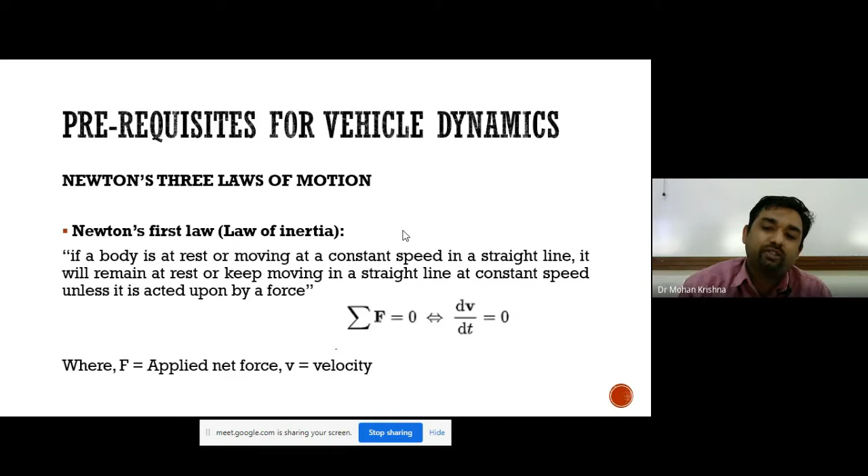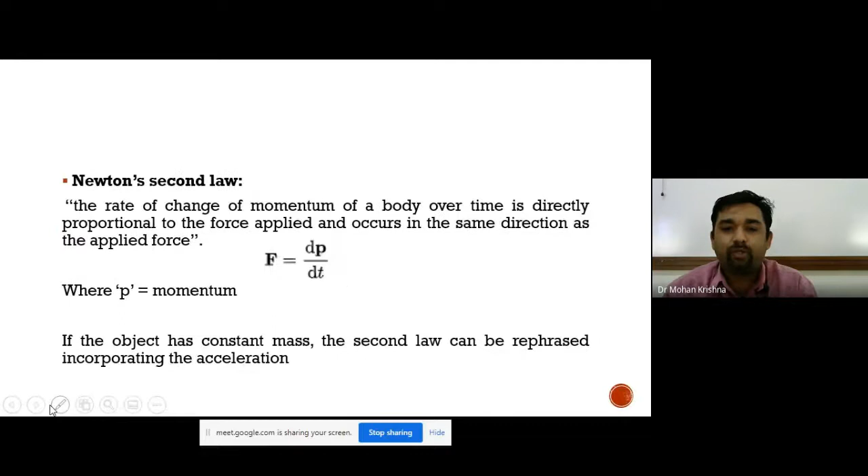So in essence, we need to understand Newton's 3 laws: the law of inertia or the first law, then the law of momentum or the second law, and the third law, which states that for every action there is an equal and opposite reaction. So for every force which the propulsion unit of the vehicle exerts on the ground, there is an equal and opposite force exerted by the ground or by the friction of the rotating parts of the vehicle itself, which tries to oppose the movement of the vehicle.

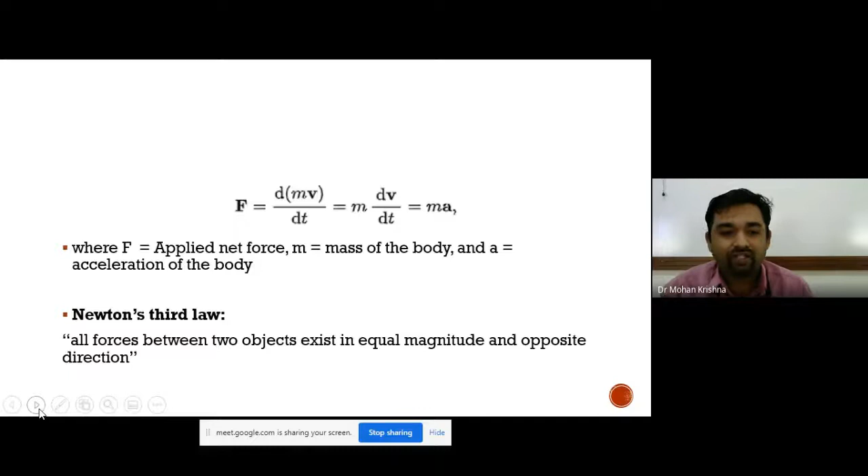So therefore, Newton's 3 laws must be taken in essence to understand the dynamics of electric vehicle. I don't need to elaborate on the 3 laws. I think all of you would be aware of it. So why do we go for electric vehicle? Why do we analyze the dynamics of electric vehicle? Let us understand the background before going in detail regarding the dynamics of the electric vehicle.

So first and foremost, as per Newton's law of momentum, the acceleration of any object is proportional to the net force exerted. So if the net force is 0, then the object doesn't accelerate. So there are several forces which act on a vehicle. To give you a brief overview, although we will deal with this in detail, as the vehicle is moving, there is resistance offered by the wind. There is resistance offered by the tires of the vehicle, by the road, and by the rotating parts within the vehicle itself.

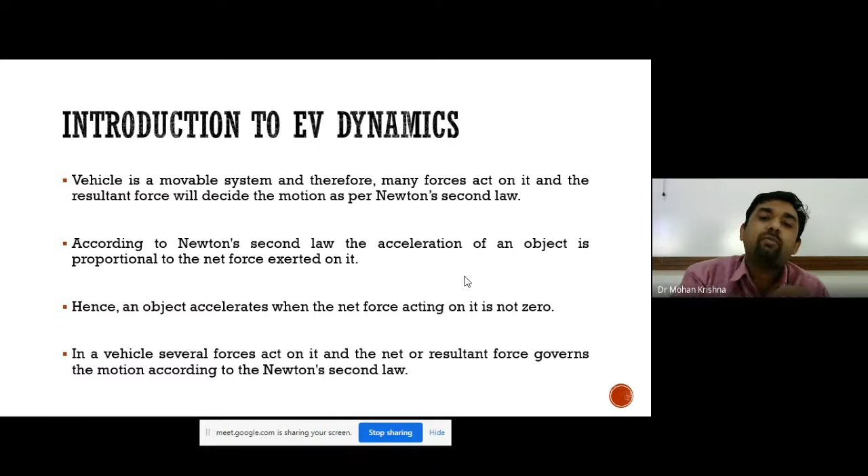So we have to consider the effect of rolling resistance forces, the drag forces, as well as the friction when our vehicle is moving, and the resultant force which needs to be exerted by the propulsion unit of the vehicle must overcome all these forces. So therefore, which subsystem of the electric vehicle is responsible for providing the tractive effort to overcome all these forces is what we are interested in.

So before going into that particular subsystem, briefly, when we discuss the three different subsystems of an electric and hybrid vehicle, we have the energy source subsystem comprising of energy sources like batteries, fuel cells, ultracapacitors, petrol tank in case it's a hybrid vehicle. Then we have an electric propulsion subsystem comprising of our power modulator, the machines which act as a prime mover, and the transmission components like gears, differentials, axles. And then we also have the auxiliary subsystem.

To give you greater clarity, you can see the different subsystems here. The energy source subsystem not only comprises of the battery pack, it also has the battery management system for condition monitoring of the battery. So the energy source subsystem comprises of the battery pack, the protection and isolation circuits, the battery management system, and the refueling unit. Here we are considering battery as the energy source.

So the energy source subsystem is responsible for providing power to both the electric propulsion subsystem as well as the auxiliary subsystem. The auxiliary subsystem comprises of your starting, lighting, ignition, power steering, power windows. Now even our outside rear view mirrors, ORVMs, are operated electrically. Then we have our spoilers, sensors, infotainment system inside our vehicle. The power requirements of all these are taken care of by the energy source subsystem,

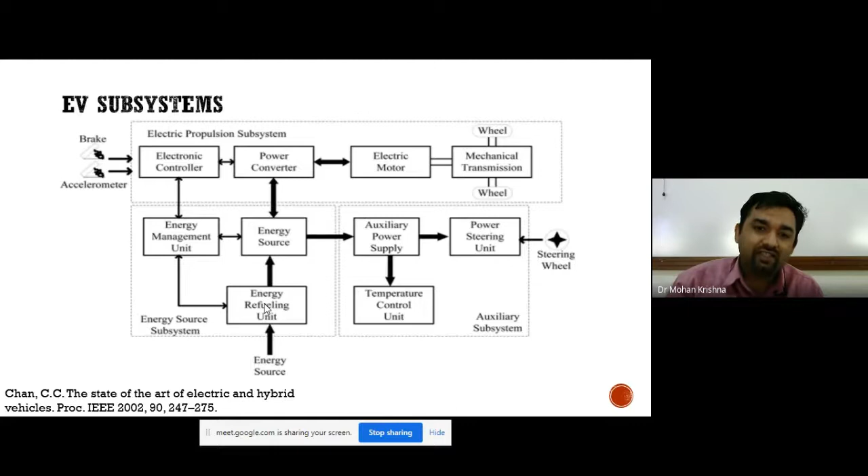apart from that of the electric propulsion subsystem. The propulsion subsystem comprises our motor drive, meaning the power modulator, motor and its associated control mechanism. It is responsible for providing tractive effort or transmitting power to the wheels on the ground to overcome all those forces which act on the vehicle. I've given you a brief overview of the different subsystems of an electric vehicle and the role the propulsion subsystem plays. The main role is in the delivery of your tractive effort.

So I think I have already explained this point. Both internal as well as external forces act on a vehicle in motion, and the propulsion system delivers the thrust for propelling the vehicle in forward direction, at the same time overcoming all these resisting forces.

So wherever I have taken information from, I have taken care to include the source. So I have referred some NPTEL courses. I have also referred some research papers. And at the end, I have also shared some additional information through web links, which would be very useful to the audience in understanding the dynamics of electric and hybrid vehicles.

So to summarize whatever we have discussed so far at the peripheral level, the acceleration or the forward movement of the vehicle depends on these four factors. The power or the tractive effort delivered by the propulsion unit, the road conditions. We'll dwell on this in detail in the forthcoming slides. Sometimes the road can be an asphalted road, it can be a kacha road, it can be a road of RCC, reinforced cement concrete. Sometimes the road can be wet, the road can be dry. Once again, it does affect the movement of the vehicle.

The aerodynamics of the vehicle, the effect of air on the movement of the vehicle, both at the front side of the vehicle as well as at the rear of the vehicle. Finally, the composite mass of the vehicle, very important is,

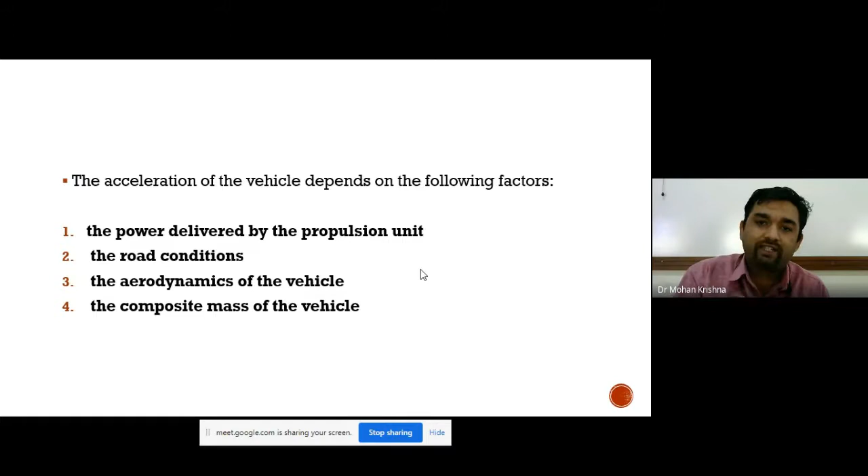Then the composite mass of the vehicle, the weight of the vehicle itself contradicts the movement of the vehicle in a forward direction, whether it is going on a level track or it is going on an inclined track. So, tractive effort. What is traction? Before going into tractive effort, what exactly is traction?

Traction is the forward movement of a vehicle, when you try to propel an object in the forward direction. It has also got to do with how much is the grip of the vehicle on the road surface. So when you are using electricity to propel the vehicle or to provide traction, it becomes electric traction.

So tractive effort is the effort required to propel a vehicle in the forward direction. And this is delivered by the vehicle propulsion system. And this is generally transmitted to the ground through the driving axle and the wheels, that is through the transmission subsystem of the vehicle. Or to be more clear, it is the force which is applied between the tire and the road surface.

Therefore, to all my esteemed audience out there, apart from the aerodynamics of the vehicle and the components inside the vehicle, the road surface and the tire play a major role in the dynamics of the electric and hybrid vehicle.

And since we are talking about electric vehicles, the entire tractive effort has to be delivered by an electrical propulsion system. Here our full electric vehicle is purely powered by battery. We are not making use of any petrol engine or diesel engine or any internal combustion engine for giving the propulsion to the vehicle. We are purely dependent on a battery.

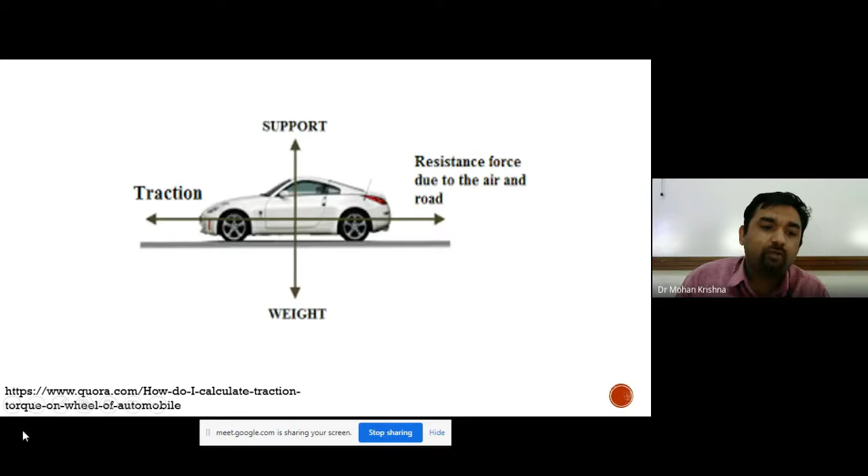Some more clarity. Here you can see the tractive effort is delivered to the rear wheel of the electric vehicle by means of the propulsion system comprising of your engine, the gear, differential. So the tractive effort is in the forward direction, but as per Newton's third law, there is always opposing torque or force which tries to oppose the movement of the vehicle, offered by the road as well as the tire itself.

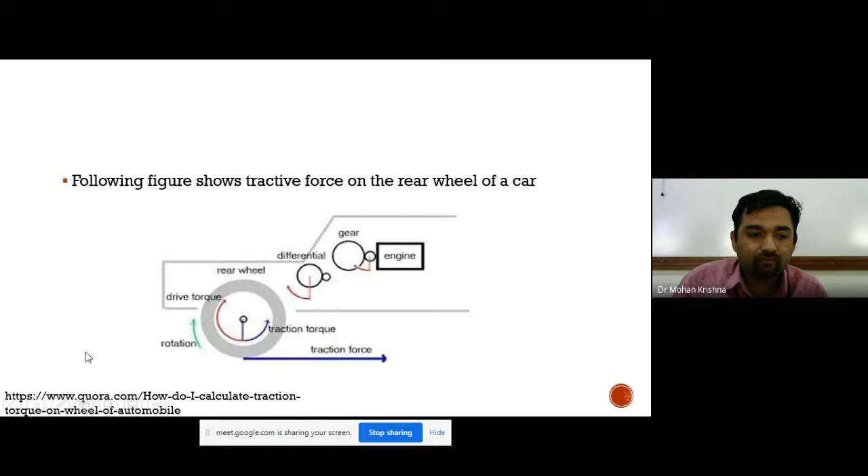So the maximum permissible traction, very important, is how much traction or how much tractive effort can be delivered by the propulsion unit, and what are the factors on which it depends: the composite mass of the vehicle or the weight of the vehicle, and the adhesion coefficient. The adhesion coefficient I have already mentioned in the second line. It is the measure of the tendency of the wheels to slip. To put it in simple words, how much is the wheel able to have a grip on the road surface? That measure is given by the adhesion coefficient.

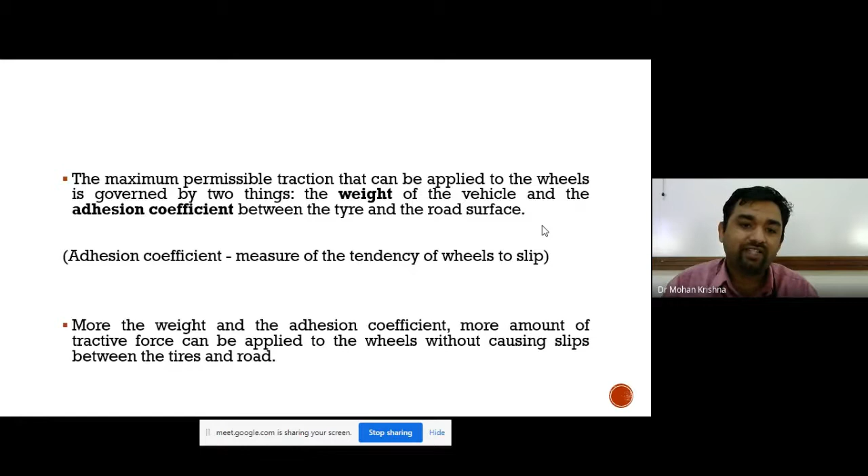So larger the size of the vehicle, larger the composite mass of the vehicle, more the adhesion coefficient, then more amount of tractive effort can be delivered to the wheels without causing them to slip between the tires and the road. So that was a brief explanation on the background: why exactly do we need to study and analyze the dynamics of an electric and hybrid vehicle?

So prerequisites are Newton's 3 laws of motion. And by now, I think all of you would also be aware of the role which the tire of the vehicle as well as the surface of the road plays. So now let me straight away go into the diagram. I would excuse myself, whatever I have drawn, it is not to scale. So kindly excuse me, I have tried my best to depict it.

So we have a vehicle here which is moving at an angle theta inclined to the surface. It is moving at a velocity v having a mass m. The tractive effort, represented by FTE, is in the forward direction. This is delivered by the propulsion unit of the vehicle. Then you have the force due to linear acceleration as well as angular acceleration: the force required to spin the rotating parts of the vehicle and the force required to propel the vehicle in the linear direction, also represented by forward arrows.

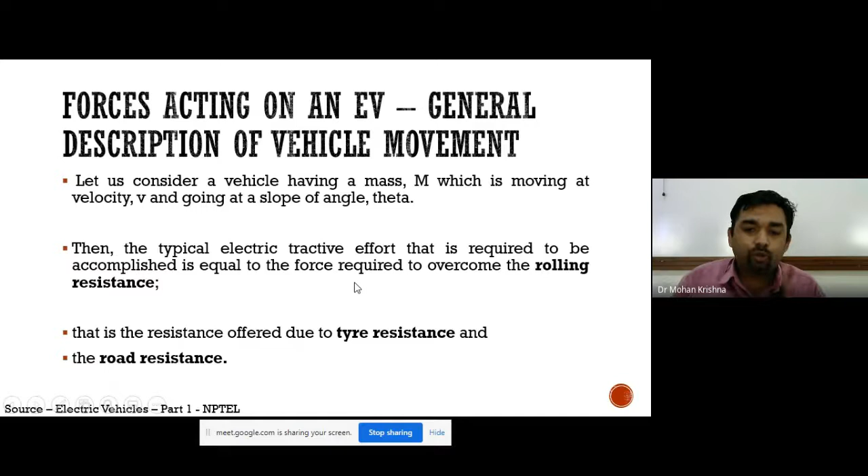So the typical electric tractive effort, as you had seen in the diagram, should overcome the rolling resistance, which is the resistance offered by the tire as well as the road. It should also overcome the aerodynamic drag. And the aerodynamic drag and the gradient force are all the more prominent when the vehicle is moving uphill or downhill as compared to a flat track. So the nature of the track in which your vehicle is commuting also matters a lot, whether it's a level track or an inclined track, or if you're going uphill or downhill or on a flyover and so on.

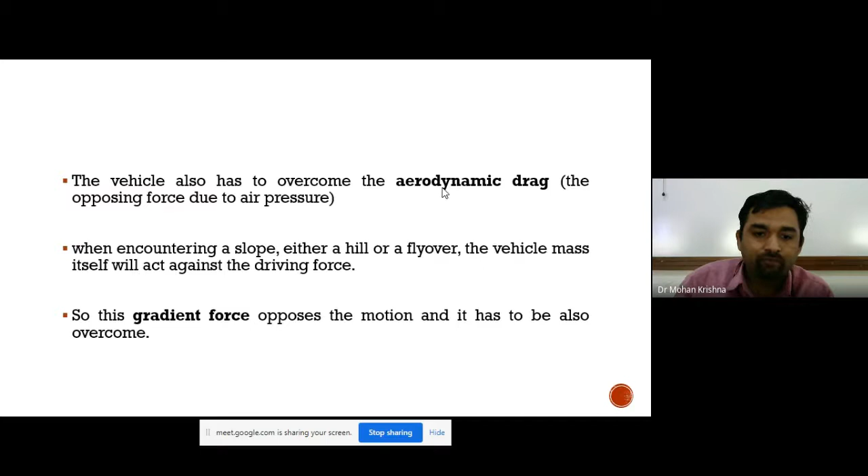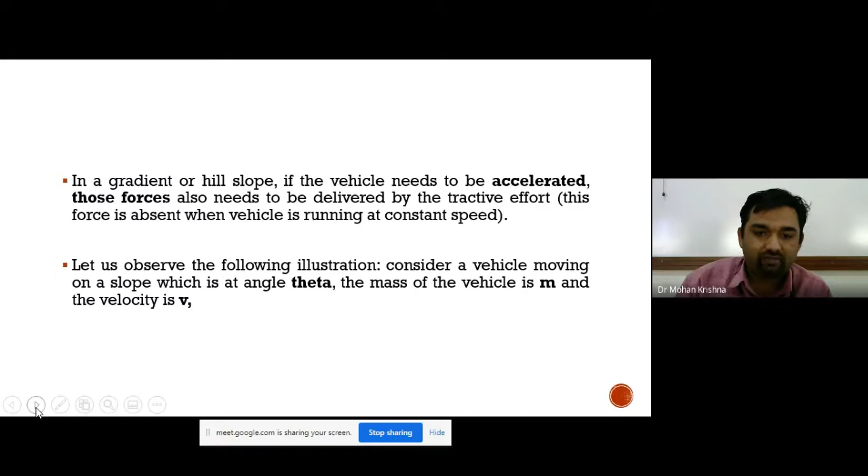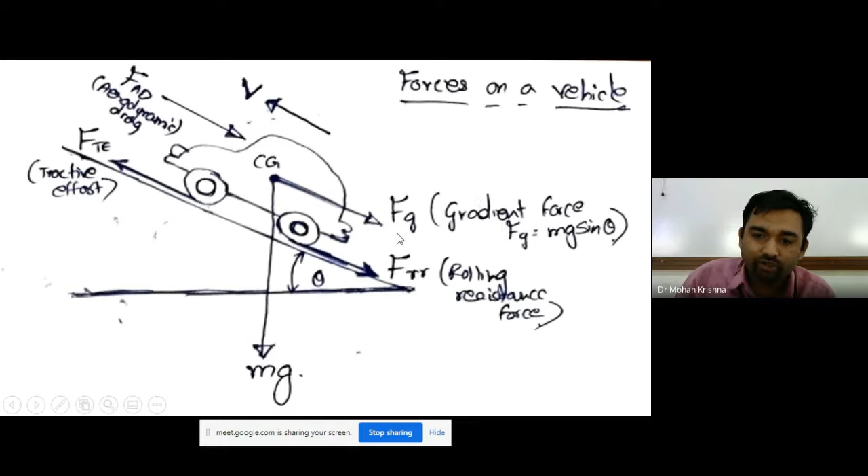So the gradient force opposes the motion, so that also has to be overcome. And the vehicle needs to be accelerated in the forward direction. So the tractive effort needs to overcome all these forces, as well as support linear acceleration and angular acceleration. I think it is very clear from the diagram that the horizontal component of the gradient force Fg is equal to mg sine theta. So considering the weight of the vehicle, the horizontal component is given by mg sine theta.

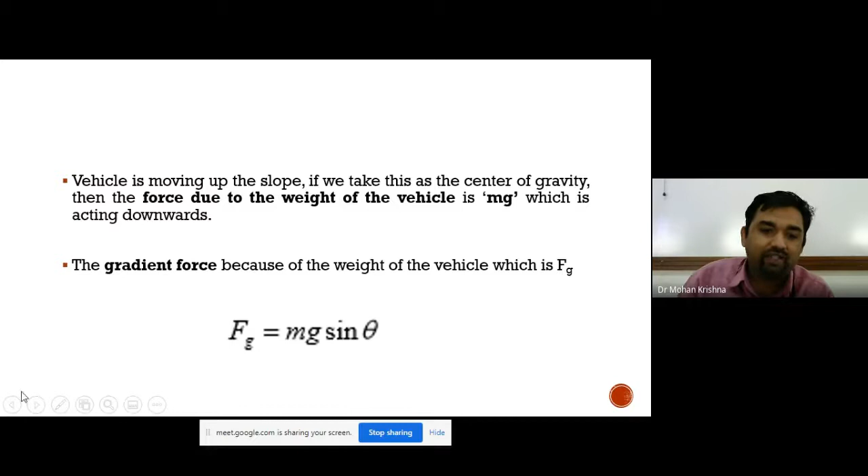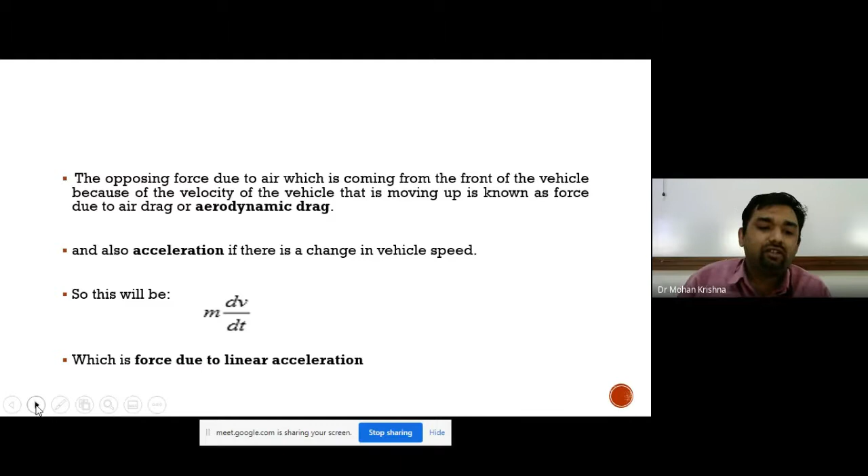Aerodynamic drag forces as well as the rolling resistance force we'll discuss in detail, and we'll try to get an expression out of it. And the acceleration due to change in vehicle speed, given by m into a or m into dv by dt, is known as the force due to linear acceleration. This will also be discussed in detail. So all in all, the tractive effort FTE has to overcome all these forces: force due to gradient, force due to rolling resistance, force due to aerodynamic drag, as well as linear acceleration and angular acceleration.

So before getting in detail into the different forces which act on a vehicle, we need to understand some basic power, energy, and speed relationships. Once again, we are just revisiting our +1 and +2 physics. But the thumb rule is, if you are going into a showroom to purchase an electric vehicle, depending upon the driver profile, if you want a particular driving range, then you must focus on the energy.

And if you want a particular acceleration, then you must focus on power. So this is the thumb rule for any electric vehicle, to be more specific, in an electric and hybrid vehicle. So energy gives the driving range and power gives the acceleration. So basic power, energy, and speed relationships must be known. So I think I don't need to do explanation here.

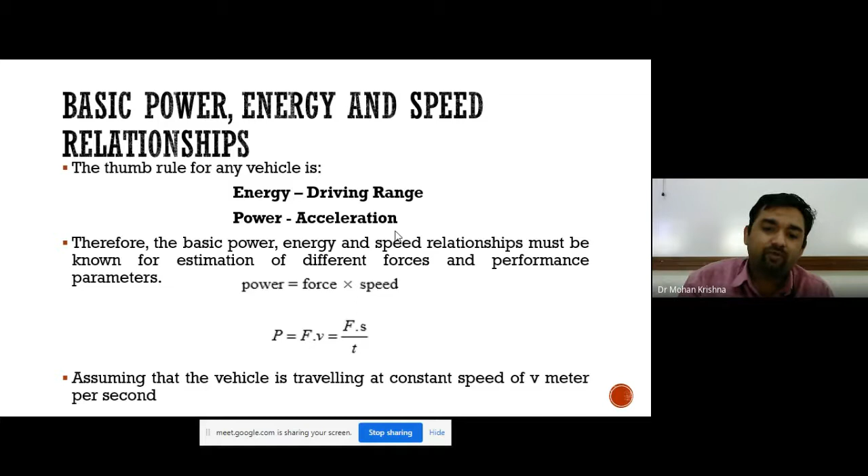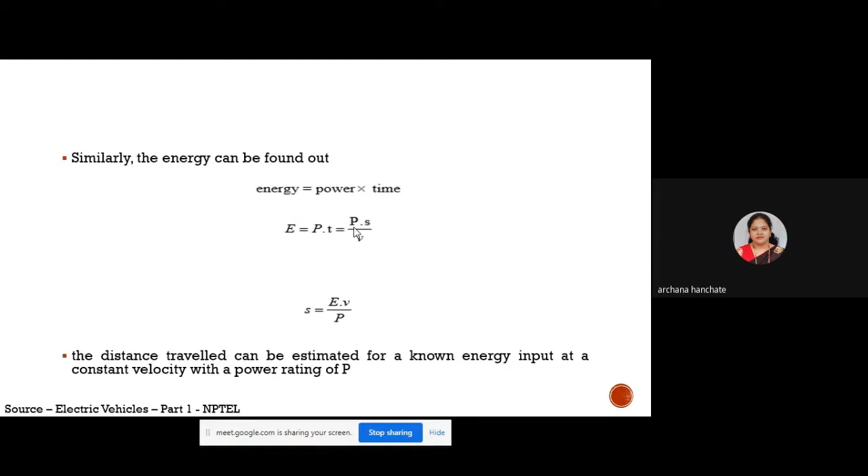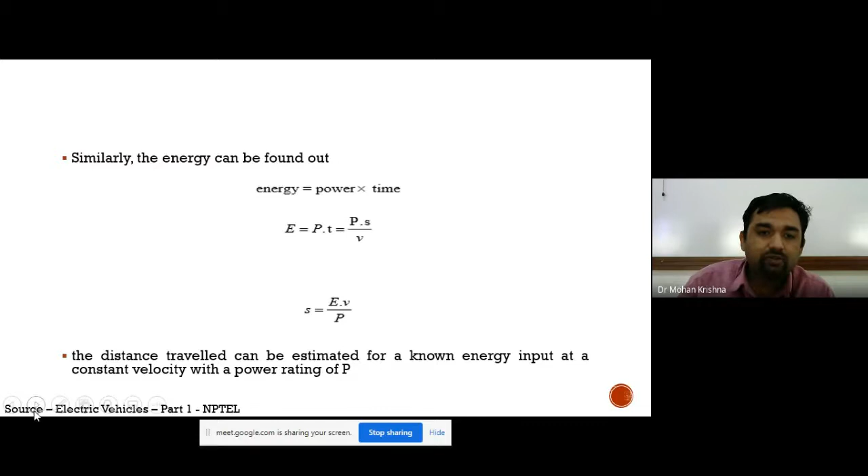Power is given by force into speed, F into V, or F into S by T. And energy is given by this expression. So the distance traveled can be estimated for a known energy input at a constant velocity with a power rating of P. So we have S equal to E into V by P. So that was about our basic power, energy, speed, and time relationship.

Now let us look at each force in detail, which tries to

Sorry, sir, it was disturbance from our participant. No problem, sir. Professor Archana, madam, could you please now mute yourself? Yes, muted, sir, muted. Thank you. Thank you. Can I proceed, sir?

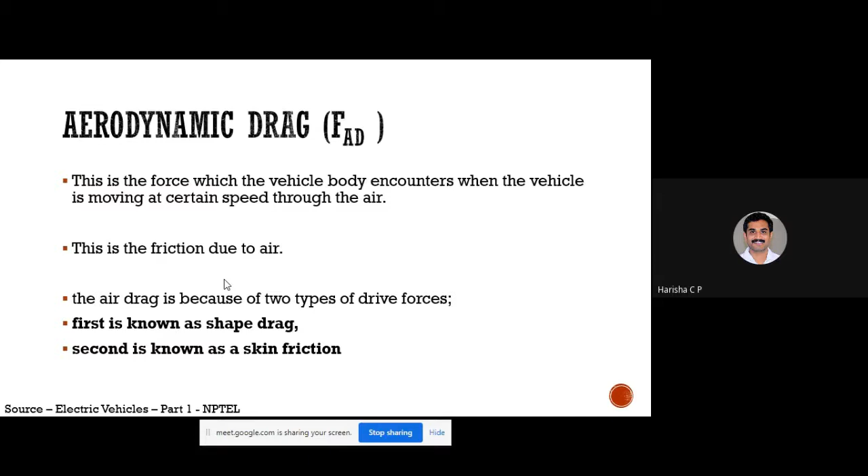Yes, sir. So now coming to the different forces which try to oppose the movement of the vehicle, let us look at each one of them in detail, and let us try to analyze the effect of these forces on the movement of the vehicle, on the speed torque dynamics of the vehicle. So the aerodynamic drag is the force which the vehicle body encounters when it is moving at a certain speed through the air.

Once again, the level of track in which the vehicle is commuting or locomoting also matters. If it's a level track, the aerodynamic drag forces are different. If it is uphill or downhill, the aerodynamic drag forces are different. If it is on a flyover or on a grade separator, the aerodynamic drag forces are different. Then the aerodynamic drag forces also vary with respect to the shape of the vehicle.

So if you have outside rear view mirrors, you have halogen lamps, you have bumpers which protrude from the vehicle, even they also have an effect on the aerodynamic drag force which is acting on the vehicle. So for different shapes of a vehicle, we'll come to know what is the value of the aerodynamic drag coefficient.

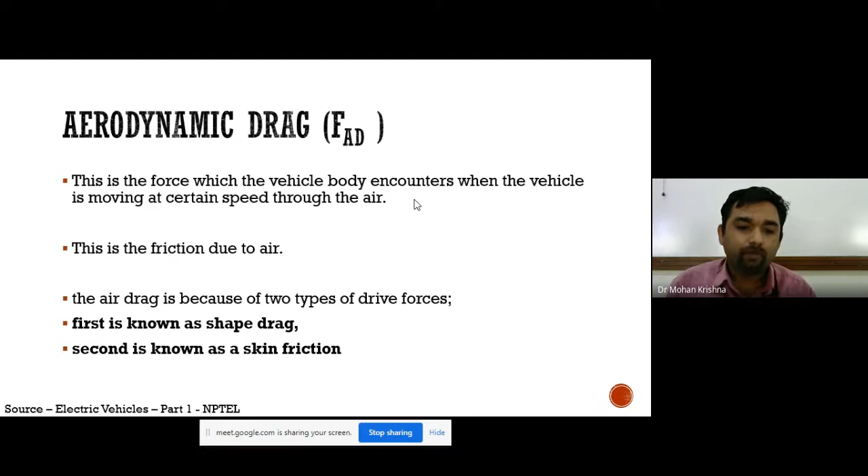Due to this, there is a pressure difference created at the front as well as the rear end of the vehicle. We have a high pressure area created at the front end of the vehicle, and a low pressure area created at the rear side of the vehicle. So now, due to this pressure difference, high pressure area tries to aid the movement of the vehicle, whereas low pressure area tries to oppose the movement of the vehicle. So this is the phenomenon of aerodynamic drag forces, which are primarily formed due to the pressure difference at the front and the rear of the vehicle when it is moving at a particular speed on a track.

Once again, here I have given a level track. It can either be uphill or it can be downhill. Here again, the vehicle is of a particular shape. Sometimes it can be an open convertible vehicle, or it can be a completely closed vehicle, or it can be a van. So therefore, the aerodynamic drag forces vary with respect to the type of vehicle, the shape of vehicle, as well as the nature of the track in which the vehicle is commuting.

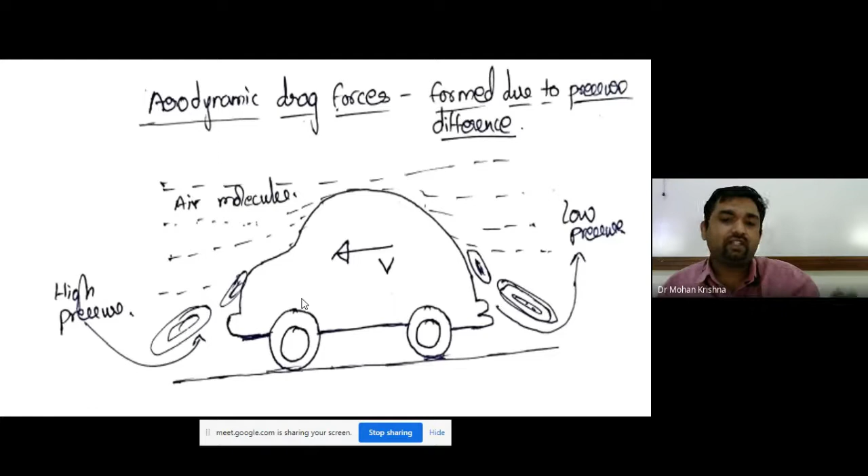So shape drag. So this is the concept of shape drag. As I had already explained, a high pressure area would be created at the front end. A low pressure area would be created at the back end. So this pressure difference would create a drag known as the shape drag.

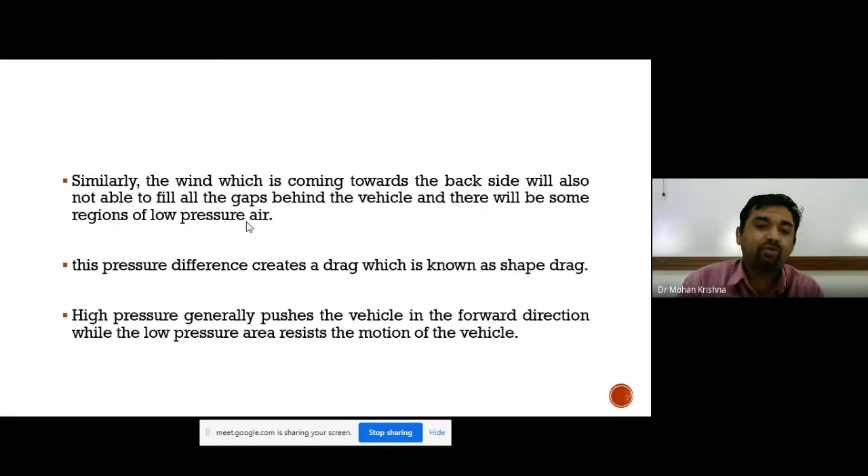So the low pressure area tries to oppose or resist the movement of the vehicle. The high pressure area tries to push or aid the movement of the vehicle in the forward direction.

So coming to skin friction, this has got more to do with the air molecules which are touching the vehicle body, which are hitting the vehicle body. So the air molecules which are in the vicinity of the vehicle move at the same speed of the vehicle as compared to the air molecules which are slightly farther away from the vehicle. Once again, due to this relative speed difference, there is friction due to these two speeds, and this again opposes the movement of the vehicle. So this is known as the skin friction.

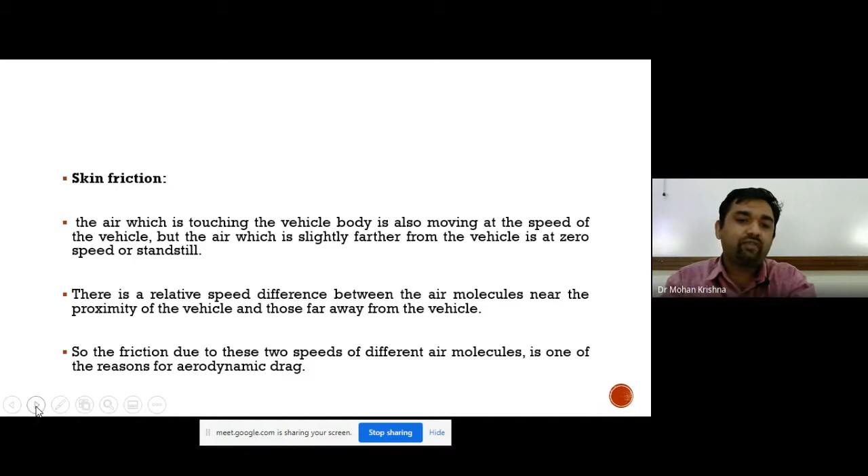So if the air molecules are in close proximity to the skin of the vehicle, the speed of the air molecules is different as compared to those air molecules which are at a considerable distance from the skin of the vehicle. So as a consequence, based on whatever we have discussed so far, the aerodynamic drag force is a function of the frontal area of the vehicle.

As I had already explained, the shape and the different protrusions, your outside rear view mirrors, the air ducts, spoilers, passages, halogen lamps, headlights, all these create drag forces. All these have an effect on the drag forces. The density of air also matters. If the air density is high, the pressure due to air also would be high. The velocity of the vehicle as well as the velocity of air. These are the main factors which affect the aerodynamic drag of the vehicle.

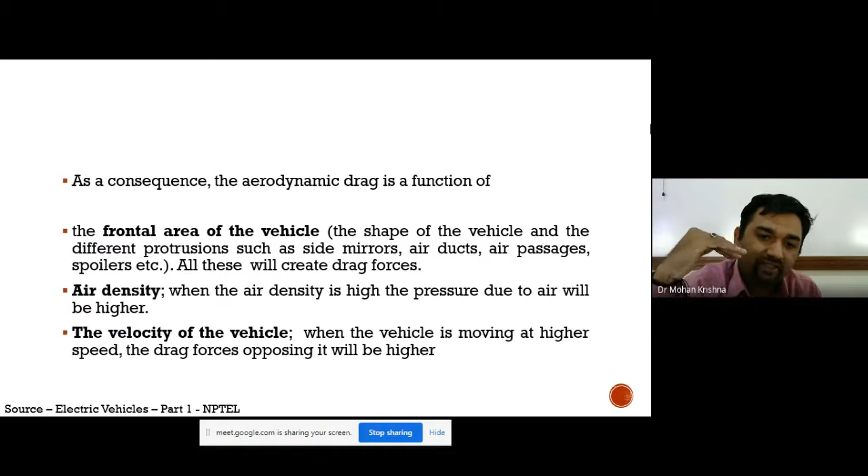Apart from this, the size and shape of the vehicle. So the aerodynamic drag component will be different for a car, it will be different for a bike, it will be different for a commercial three-wheeler, it will be different for a truck, it will be different for an electric bus. Then also the track on which the vehicle is locomoting, once again level track, elevation, slope, all these are the other auxiliary factors which affect the aerodynamic drag force.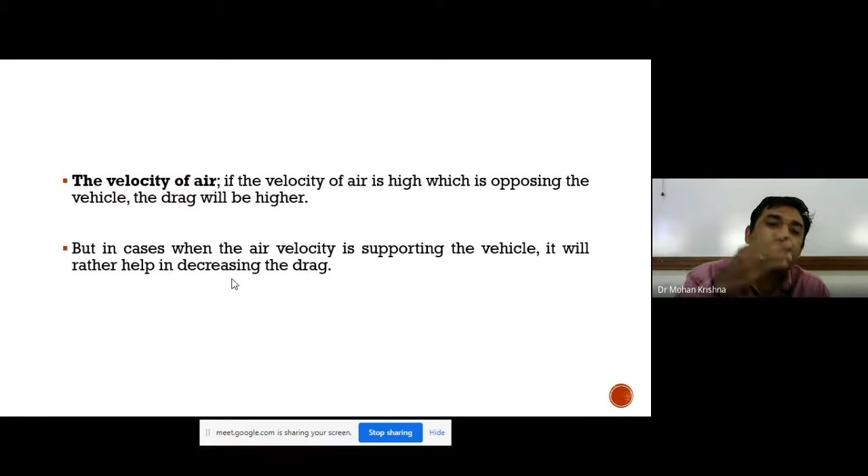So we have the frontal area, the air density, the velocity of the vehicle as well as the velocity of air. If the velocity of air is high as compared to that of the vehicle, then the drag would be higher. In some cases, the air velocity would support the vehicle speed. Once again, it depends on the direction in which the wind is flowing. That will again have an impact on the aerodynamic drag force.

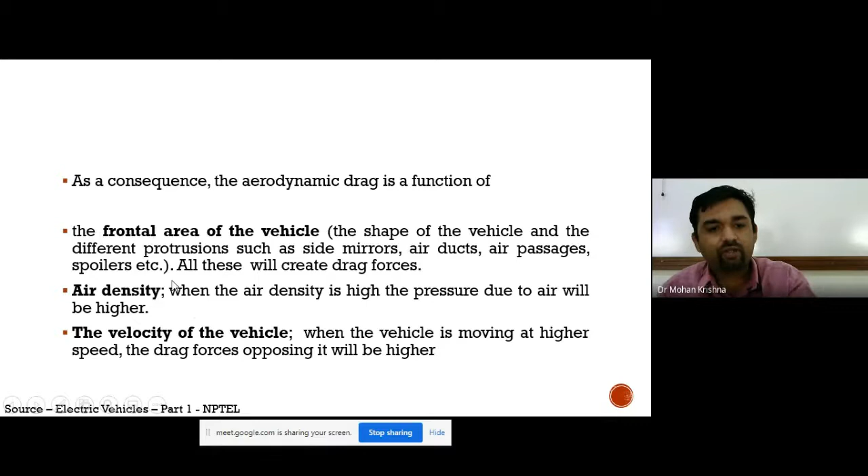I'm not doing any derivation as such, but based on our understanding that the aerodynamic drag force is a function of the frontal area of the vehicle, the air density, the velocity of the vehicle as well as the velocity of air, we can get this expression. In terms of an equation, we get the expression for the aerodynamic drag force as half rho CD into A into (V plus V air) the whole square.

So rho is the density of air, kg per meter cube. CD is the aerodynamic drag coefficient. This is the most important parameter, which depends on the design parameters of the vehicle. This is known as the aerodynamic drag coefficient, CD. V is the forward velocity of the vehicle in meters per second, and V air is the opposing velocity of air in meters per second. And A is the frontal area of the vehicle in meters square.

As I had already explained before, it all depends on the direction of wind also. If the air velocity is supporting the forward velocity, if it is going alongside the vehicle, it will be negative, and it will be positive for opposing air velocity.

To give some more clarity, we discussed the concept of aerodynamic drag coefficient, which depends on the design parameters of the vehicle. So as you all can see, for an open convertible type vehicle, we have the aerodynamic drag coefficient ranging between 0.5 to 0.7. For a van, we have the aerodynamic drag coefficient ranging from 0.5 to 0.7. So generally, in India, our vehicles are either of ponton body or wedge-shaped body. We don't have open convertible vehicles. Of course, we do have, but they are very few in number.

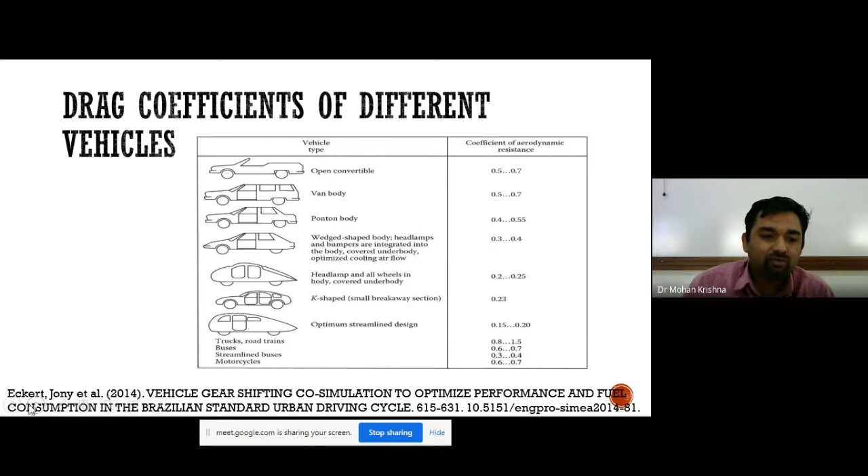Now coming into rolling resistance. To be more clear, all frictional load forces, whether internal or external. So we have to consider the rotating parts or rotating components inside the vehicle itself. We have the motor, we have the transmission components comprising of our gears, differential, axles, bearings, friction within the drivetrain.

There's a difference between drivetrain and powertrain. Drivetrain is that system of a vehicle which delivers power to the wheels. Powertrain comprises of drivetrain plus the engine or the motor. So the fundamental difference is a vehicle drivetrain does not comprise the motor or the engine, whereas your vehicle powertrain comprises the motor or engine plus the drivetrain.

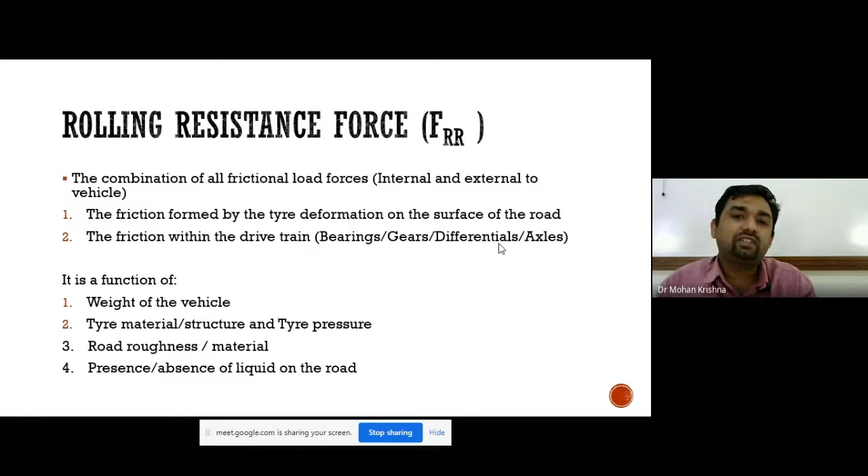So all our frictional load forces, both internal as well as external, are referred to as the rolling resistance forces. The tire, the rotating components inside the vehicle and the road surface play a major role in the rolling resistance force. And they are a function of the composite mass, the tire material, road roughness, as well as the presence and absence of liquid on the road. So here you can see the rolling direction as well as the rolling resistance, which is trying to oppose the rolling direction.

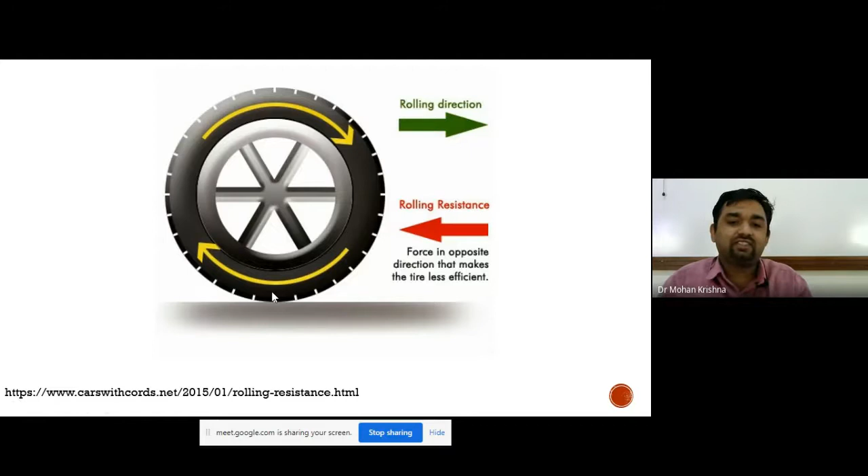Once again, when the tire touches the road surface, it will not be exactly circular. There will be some slight deformation due to compression and shearing, so the effective radius of the tire would be reduced. We'll be discussing this in the forthcoming slides. This is an ideal case. Practically speaking, when the tire touches the road surface, there will be some compression and shearing, due to which there will be a deformation in the tire. This deformation is also due to rolling resistance, the resistance offered by the road as well as the tire.

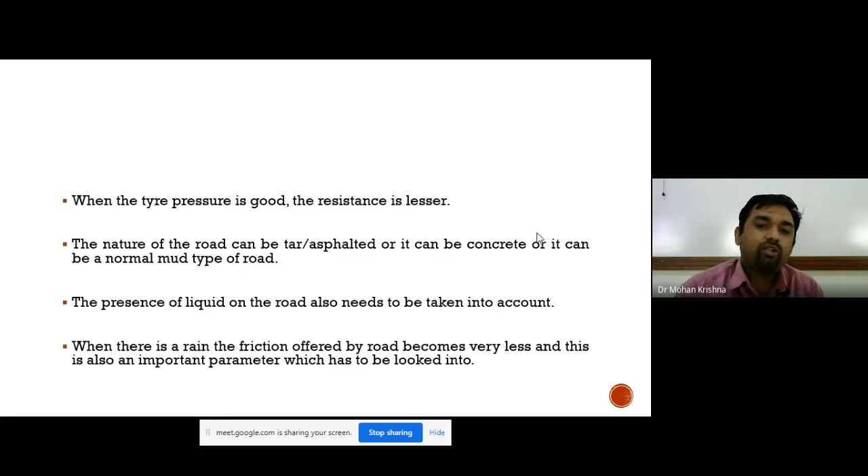So if the tire pressure is good, the resistance is lesser, the rolling resistance is lesser. Once again, if it's a mud type road, a normal tar or asphalted type road, the presence of liquid, or if there is rain, the friction offered by the road will be less. I've already explained these things.

To give you a mathematical foundation as to the rolling resistance force, we can consider a typical wheel of a vehicle which is moving on a road surface here. So as I had already told you, ideally there should not be any deformation, but practically there will be deformation in this tire due to compression and other forces, shearing forces. So the effective radius R gets reduced to RD due to the deformation in the tire. So here the P is the weight of the tire.

Once again, the aerodynamic drag force is linked to the rolling resistance force also. If this tire is moving from left to right, then the aerodynamic drag forces or resistance due to wind will be more at the front side. The air molecules will hit the tire at the front side more than the ones hitting at the back. Due to which there will be some pressure difference created at the front side of the wheel as well as the back side of the wheel, due to which the weight of the wheel gets shifted by A from the center to the right side.

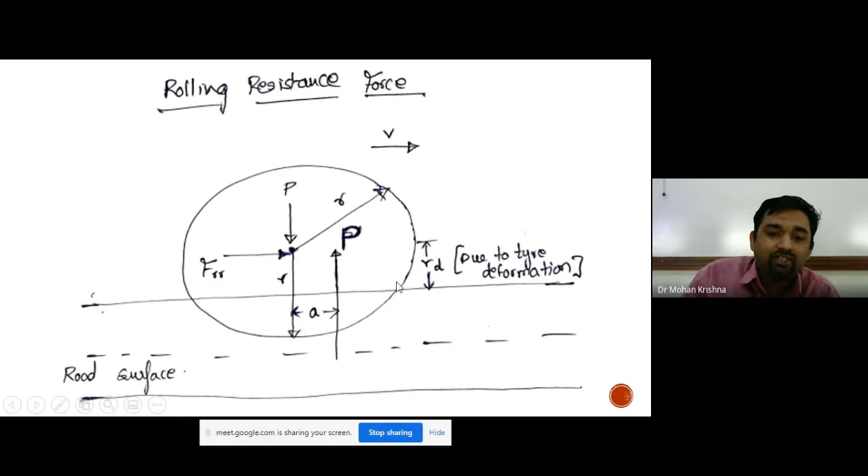So if we consider our front wheel going from left to right in the forward direction, the rolling resistance moment of this particular wheel can be given by TR equal to P into A. Here, please observe the weight of our wheel has been shifted from center to the front side. So this can be compared with the force due to rolling resistance. Rolling resistance moment is a turning force. So force into radius gives us the torque. So our rolling resistance moment can also be expressed as the rolling resistance force into the effective radius of the wheel considering the deformation in the tire.

So if we have FRR into RD, we equate that to P into A. So finally we get the expression for the rolling resistance force FRR as P into A by RD. So that ratio A by RD is given as the coefficient of rolling resistance, so FRR equals P into mu RR.

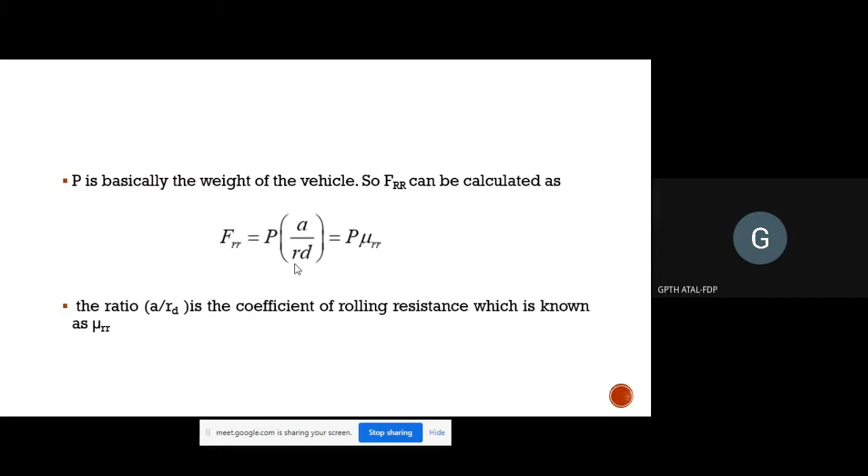I hope it's clear. I'll be happy if any clarification is required from the audience. Or I'm also ready to take up some questions at the end of the PPT. Dhruva Kumar sir, can we do it at the end or? Yes, sir. No problem. And some questions have been posted in the chat box. Would you be able to? Yeah, this time. Yes, sir. This is by Mr. Naveen Kumar.

Which tire material presence will reduce the rolling resistance? Generally, Professor Naveen, tire material is generally natural and synthetic rubber only. So it is the wheel base which plays a major role rather than the tire material, because for most vehicles, as far as my knowledge is concerned, for tire material they make use of natural and synthetic rubber, some plastics, and some sulfur is added. And 99% of our tires are radial. They are constructed radially. So most of the vehicles go with this particular tire configuration only. But wheel base plays a major role.

Will the presence of water on road increase the resistance? Okay, fine. I think I've already explained that to you.

Thank you, Professor Naveen. Any other question? I would be happy to take it now before I proceed, because I've been going on with the PPT. I'm not able to gauge whether it has been understood. I think we'll take it up in the end, sir. Fine, sir. Then I'll proceed with the presentation. Yeah. I think Professor Aprameya is asking another question, sir, in detail, which is dominating.

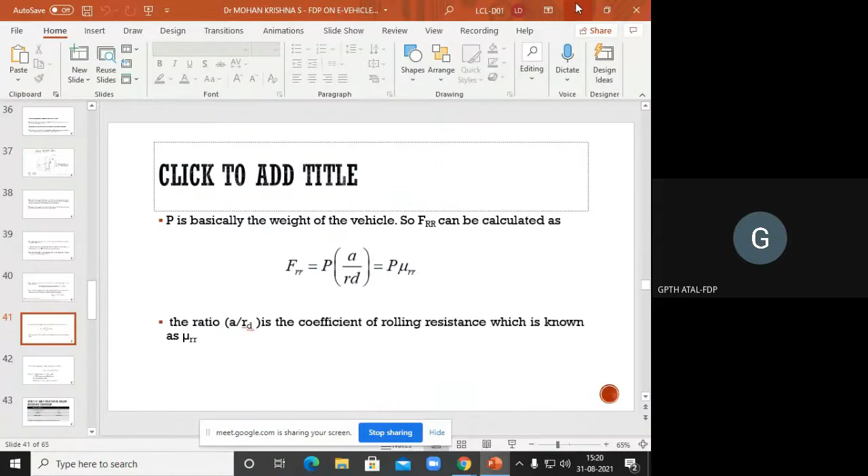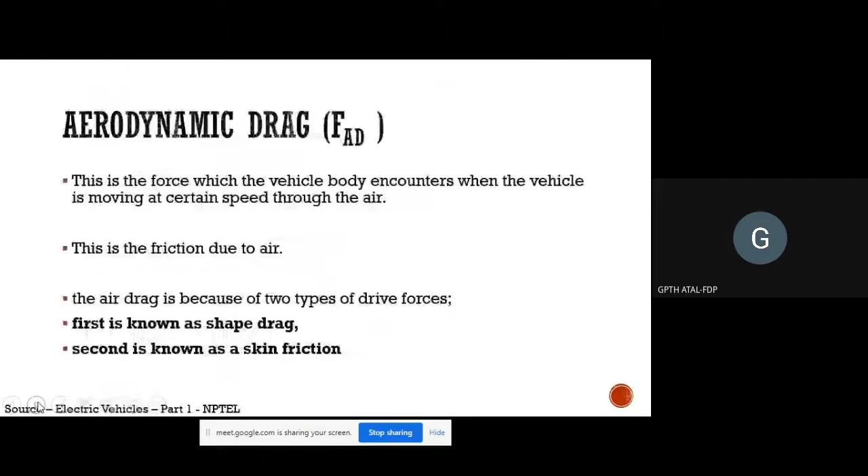Thank you, Professor Naveen, for the support. Any other question? I'll proceed with the presentation. Maybe I'll take some more questions at the end. Dhruva sir, can I proceed with the presentation? Yeah, please, sir. Sorry, again. Yes.

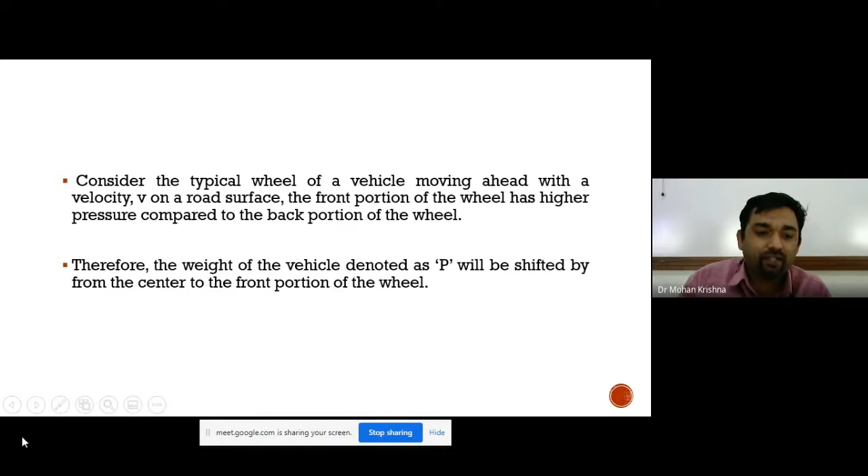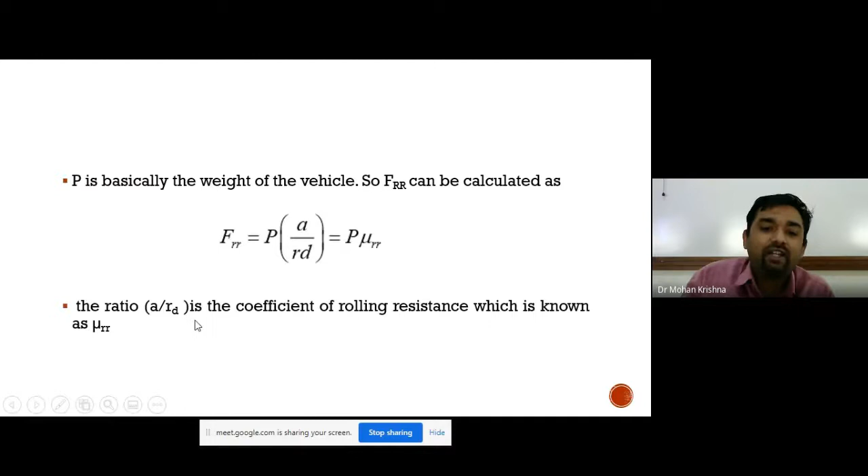So therefore, the weight of the vehicle would be shifted from the center to the front portion of the wheel. So the opposing force also would be shifted by a distance known as a. Finally, we even discussed the expression: Fr is equal to P into a by Rd. This a by Rd is the coefficient of rolling resistance. Now this coefficient of rolling resistance varies. I will be showing you in the next slide what the different test cases are.

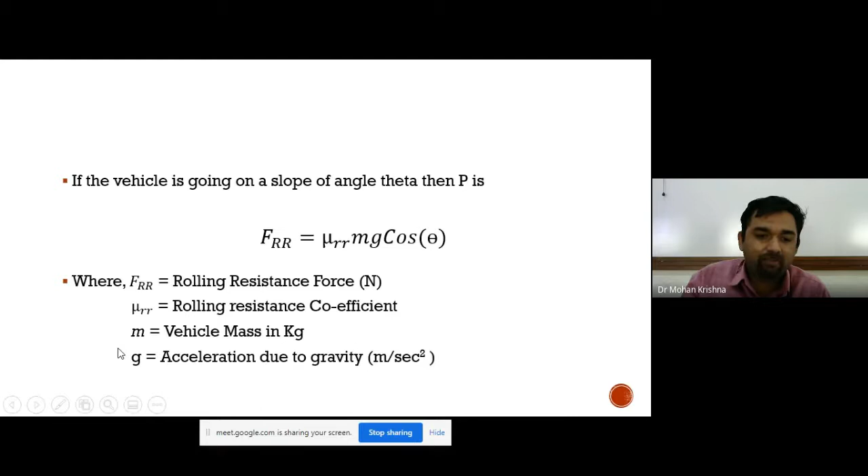So now we have FRR equal to P into mu RR. P is the weight of the vehicle, which is given by mg cos theta. So we have FRR given by mu RR into mg cos theta. So the rolling resistance force in newtons, rolling resistance coefficient, vehicle mass in kg, acceleration due to gravity. So here, I think this would also help the audience.

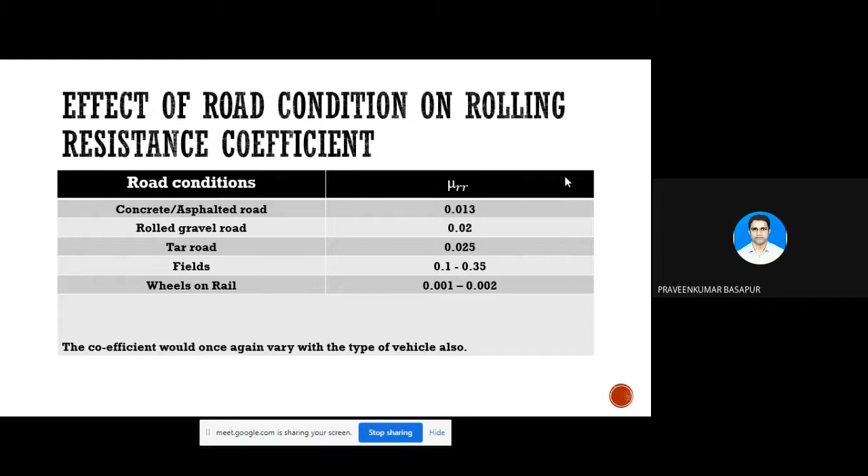So if it's a concrete or asphalted road, our coefficient of rolling resistance is 0.013. For a rolled gravel road, our coefficient of rolling resistance is around 0.02. For a tar road, it is around 0.025. So once again, I forgot to mention this. Wheels on rail will be different.

Here, when we were talking about wheel and tire, we were talking mainly about natural and synthetic rubber tires, or the tubeless tire which is mounted on the wheel rim. But we conveniently forgot our rail as well as the wheels on the rail. So there again, the rolling resistance coefficient will be different. And the resistance offered by the running rails or the railway track will be different as compared to that of a road.

In fields, we have our farmers plowing their fields using tractors. So once again, the rolling resistance offered by the field to the movement of the tractor is different. So tractor wheel diameter is very huge because the rolling resistance in fields is very, very high. You need to apply more pressure, more tractive effort in order to propel your vehicle. So all in all, it varies with the type of the vehicle also.

By now, it must be clear. Even in different segments of the vehicle, you have sub-segments. Like for your three-wheelers, you have an auto rickshaw, you have some transportation and logistics-based vehicles. I'm not getting the name. You have two-wheelers where you have bikes, you have electric bicycles. So it once again varies with the type of the vehicle.

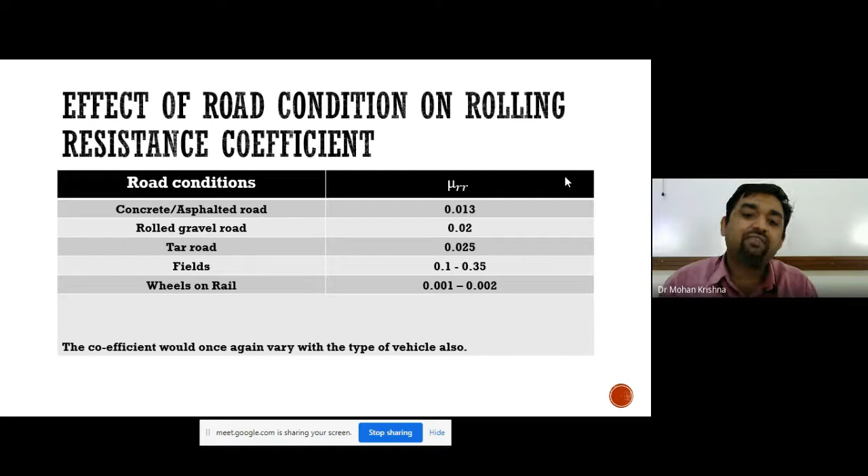Slippage has got more to do with the adhesion coefficient of the wheel. So how good is the wheel able to grip the road? That measure is given by slippage. So that is comparatively negligible, but deformation, because of the resistance offered by the road, is having maximum impact on the rolling resistance force.

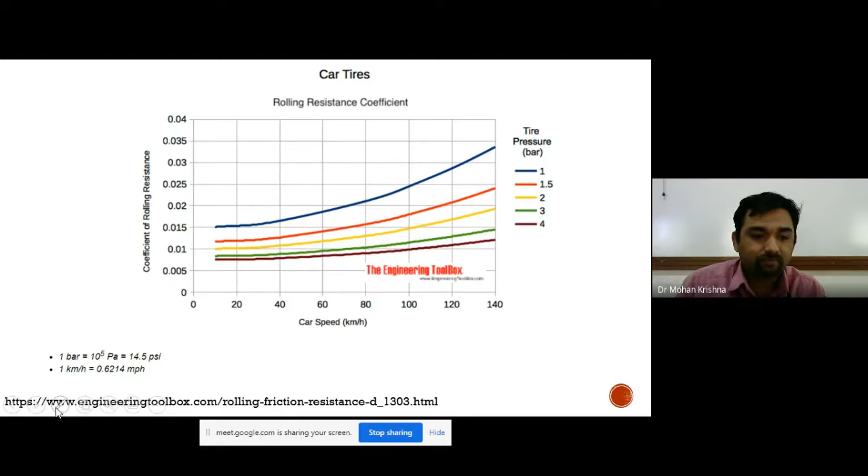You can see, in the legend, you are having the tire pressure for tires from 1 to 4. So as it goes on increasing, the coefficient of rolling resistance reduces, and you are able to realize a uniform speed. So the tire pressure also plays a major role on the rolling resistance coefficient, or mu RR. I think I've tried my best to explain the concepts of aerodynamic drag and the rolling resistance force.

So now we have force due to gradient, or it is more popularly referred to as hill climbing force. So by now, aerodynamic drag as well as the rolling resistance opposes the movement of the vehicle. It is very clear. So now this particular force, which is either called gradient force or hill climbing force, is more prominent when your vehicle is encountering a slope or climbing a hill. It is generally denoted by Fg.

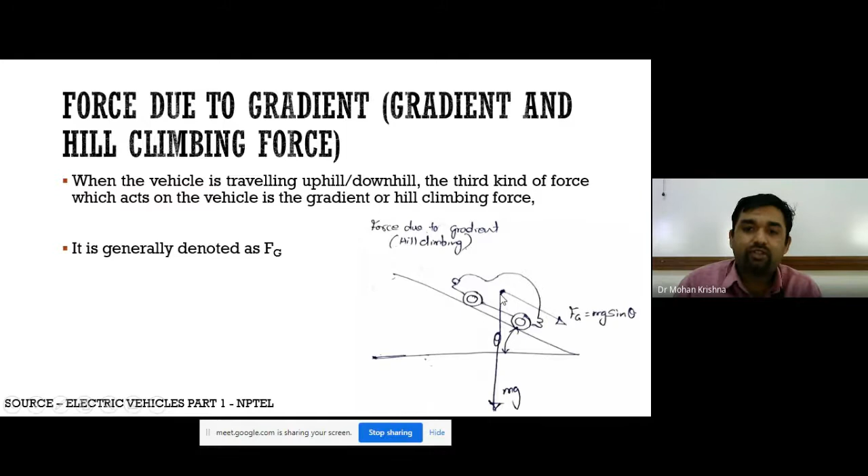So when we take the horizontal component of the force due to gradient, we get Fg equal to m g sine theta. So this force does not exist when the vehicle is moving on a flat road. So this point is very clear. This comes into picture only when your vehicle is encountering a slope, either uphill or downhill. And whether it is going uphill or downhill, the nature and magnitude of this force will change. If the vehicle is going uphill, the force would be positive.

So in this case, as you all are aware, our machine will be operating in 4 quadrants: forward motoring, forward braking, reverse motoring, reverse braking. So generally when we are going uphill, the gradient force is positive. Here our machine will be operating in the motoring mode. It will be transferring power from source to load, that is from the energy source subsystem to the propulsion subsystem and subsequently to the wheels. And finally, the vehicle propels in the forward direction.

Suppose the vehicle is coming downhill, then our electrical machine will work as a generator. So power is delivered back from the load to source. Again, for this, regenerative capability has to be present. Otherwise, this energy is also lost in the form of heat. When we are coming downhill, we apply brakes. We generally apply brakes as well as clutch. We don't apply the accelerator when we are coming downhill and if it is steep.

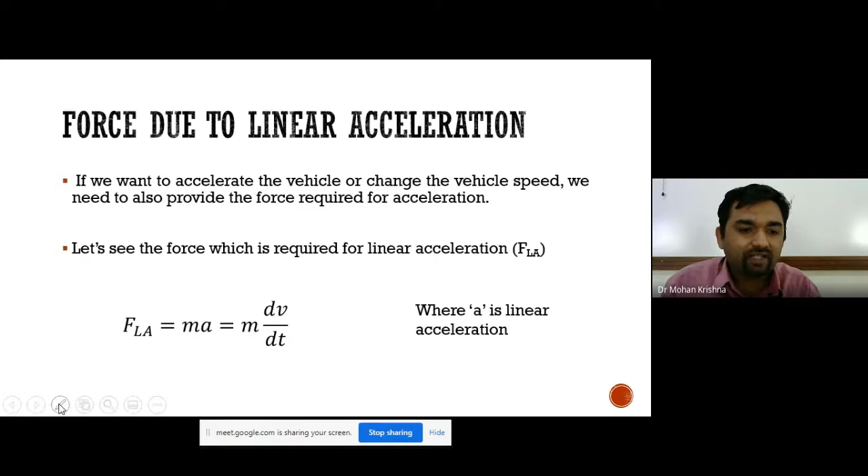So therefore, the force required for linear acceleration is very simple, m into a, or m dv by dt. And the force required to spin the rotating parts within the vehicle drivetrain. Once again, the difference between a drivetrain and powertrain is only with respect to the motor. Drivetrain delivers power to the driving wheels. Powertrain comprises the motor or engine plus the drivetrain. So drivetrain is purely the transmission mechanism without the motor, whereas powertrain is the transmission mechanism with the motor or the engine, in case it's a hybrid vehicle.

So if we have to spin the rotating parts, the transmission components within the vehicle drivetrain, the propulsion unit must deliver supporting torque to the rotating parts within the vehicle drivetrain, which is known as the force due to angular acceleration. I think all of you must be aware there are different rotating equipments within a transmission system of a vehicle. You have gears, you have differential, you have axles. So the main objective here is to overcome the moment of inertia. Once again, Newton's first law. Since there are so many rotating parts present within the vehicle, there is an associated moment of inertia, and the tractive effort must overcome this inertia of the drivetrain, which is known as the force due to angular acceleration.

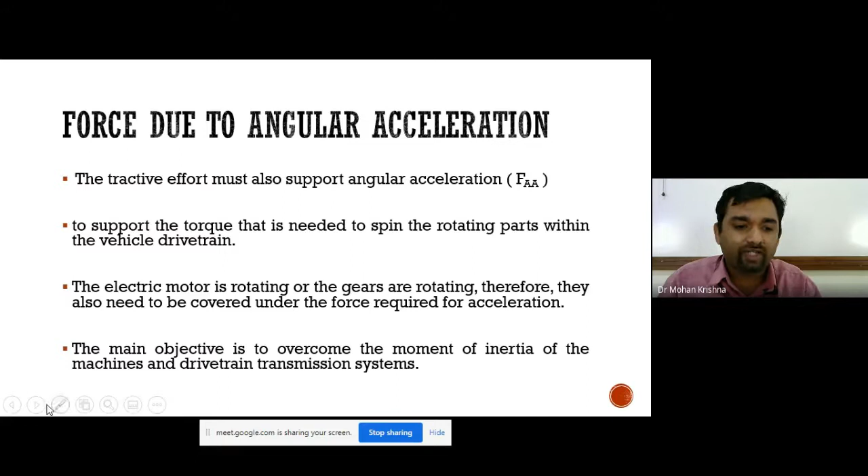So therefore, from Newton's second law of motion, we have T equal to J d omega by dt, or when we convert it, we have J by R dV by dt, or our force is given by the torque by radius. Finally, we get the expression J by R square dV by dt. I think this is simple mathematics, which most of the audience would be aware of.

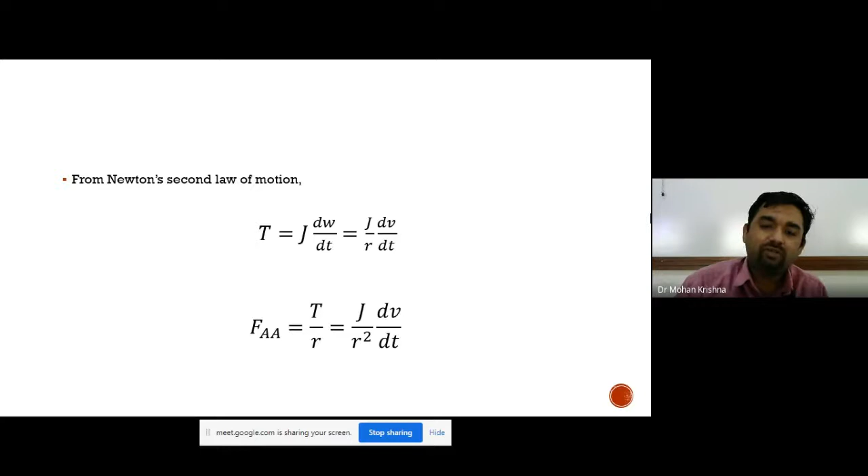So finally, let us come to the total tractive effort. We have discussed different forces which act on a vehicle. We had forces due to the aerodynamic drag, forces due to the rolling resistance, forces due to gradient or hill climbing force, which is predominant only when going uphill or downhill. Then we have forces due to linear acceleration as well as angular acceleration. So the total tractive effort delivered by the propulsion system to accelerate the vehicle in a forward direction must overcome all these opposing forces as well as aiding forces which act on the movement of the vehicle.

So by now, I think all of us would be clear, opposing forces are the forces due to the rolling resistance, aerodynamic drag, and hill climbing or gradient. Aiding forces are forces due to linear and angular acceleration. So therefore, we can express our total tractive effort as a cumulative sum of the rolling resistance force, the gradient force, the aerodynamic drag, the force due to linear acceleration, and the force due to angular acceleration. So both opposing as well as aiding forces are supported by the tractive effort of the vehicle.

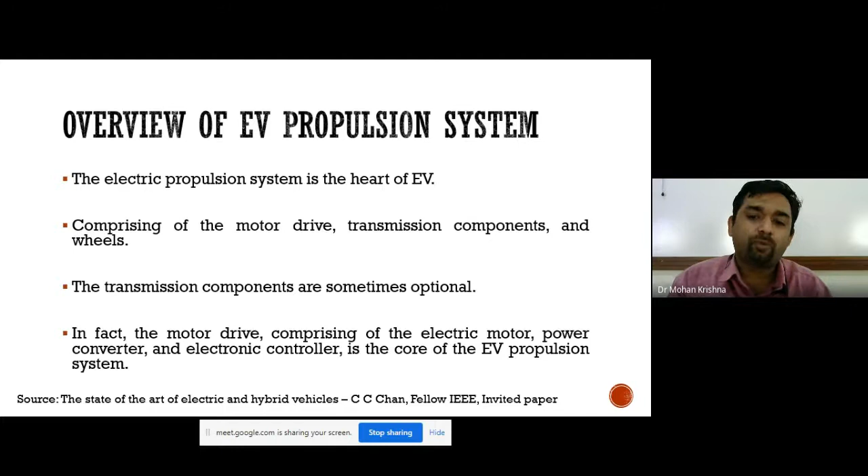Electric motor is an electromechanical energy conversion device. It doesn't need any explanation, which you all are aware. So when it is moving in the forward direction, it delivers power from the energy source subsystem to the load. During braking, it captures the kinetic energy from the wheels and delivers it back to the battery. So either it charges the battery or it can be used for some reserve power storage.

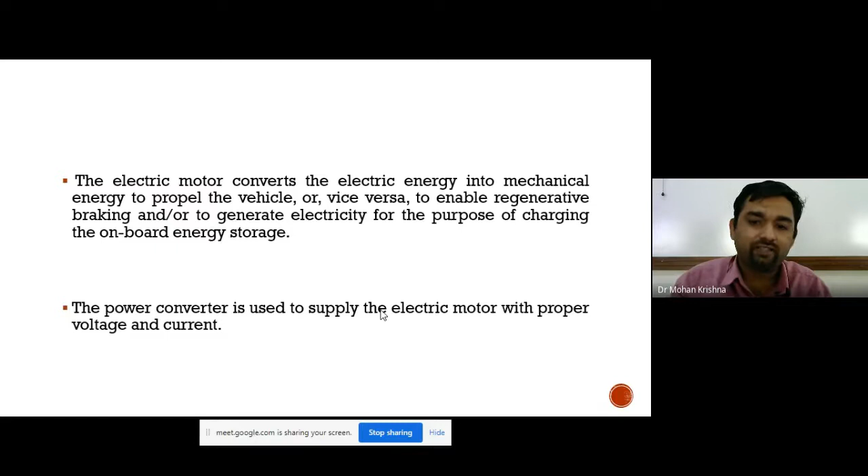So generally, it is better to have a regenerative braking mechanism to avoid energy losses and to increase the efficiency. So if you have an onboard charger and onboard energy storage, it is better to have a regenerative brake mechanism also, which goes hand in hand. Power converter, I've already deliberated on that.

So the electronic controller provides the gating pulses to the switches of the power modulator. Therefore, the profile of the voltage and current supplied to the motor is changed by means of these electronic controllers. And it also tries to control the speed of the motor. You can realize a motor of a very high speed bandwidth, a very smooth speed performance, dynamic as well as steady state, a good torque handling capability. All these features can be realized with our electronic controller.

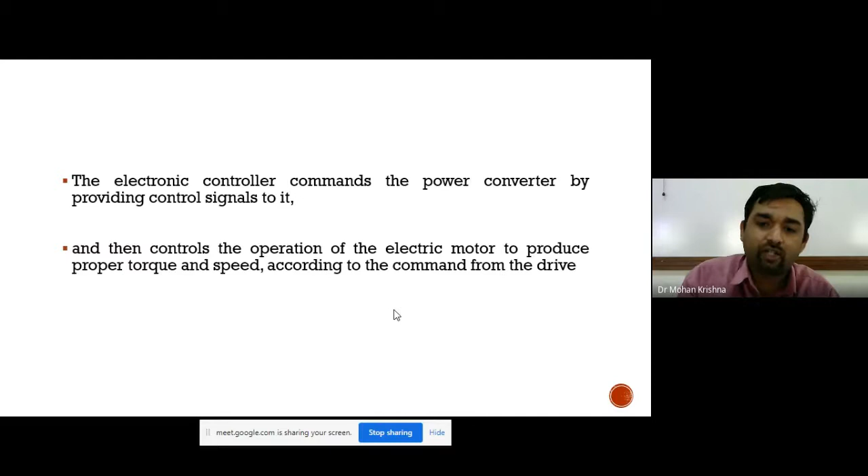So, major requirements of the EV motor drive. If our propulsion system has to deliver consistent tractive effort in hostile environment, we need to take into effect some important factors. First and foremost, we must have a high instant power and power density, energy density. As I had already told in the beginning, if it is with respect to driving range, then we have to focus on energy. If it is with respect to acceleration, then we have to focus on the power requirements.

So generally, we make use of motors which have high torque to power capability inside our propulsion system, and motors which are comparatively smaller in size. So generally, PMSM and BLDC as well as induction motors are the three most popularly used machines in the propulsion subsystem of electric vehicles. Even the recent Tata Nexon electric vehicle has a permanent magnet synchronous motor, which is used in the propulsion unit.

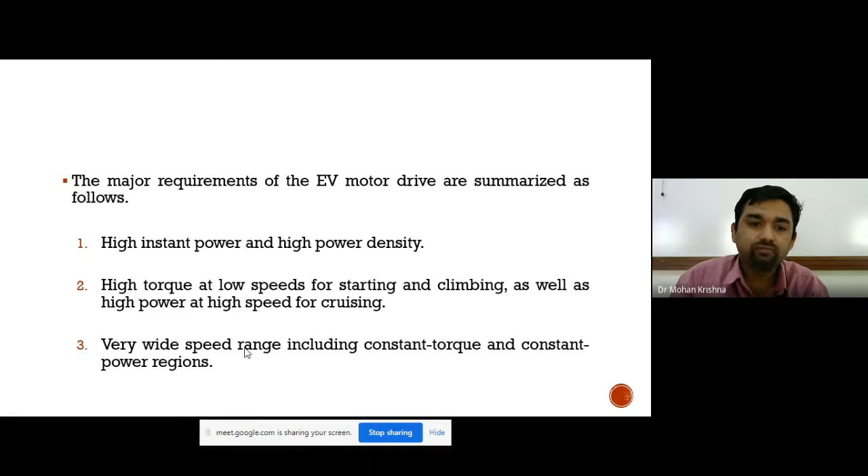And when our vehicle is hill climbing or encountering a gradient, our propulsion system must have high torque capability. At the same time, it must have high power capability if you want to realize cruising or high speeds. So your motor drive system must operate in constant torque as well as constant power regions if we have to get a very good dynamic and steady state performance. Fast torque response, very important.

And high efficiency. This is where you try to use regenerative brakes. Then you can optimize the size of the motor. You can optimize the size of the battery. You can increase the energy density of the battery. You can reduce the associated losses in the form of heat; you can capture them. So all these things would be important when you choose a particular propulsion system for your vehicle.

Reliability and robustness is very, very important. We encounter different operating conditions: uphill, downhill, level track, different types of roads, asphalted, RCC, a mud road, different types of tires, different types of climatic conditions. Nowadays, most of our electric vehicles, in fact, the Morris Garages electric vehicle, comes with climate control. Even Tata Nexon EV comes with climate control capabilities. So the climatic conditions also play a major role.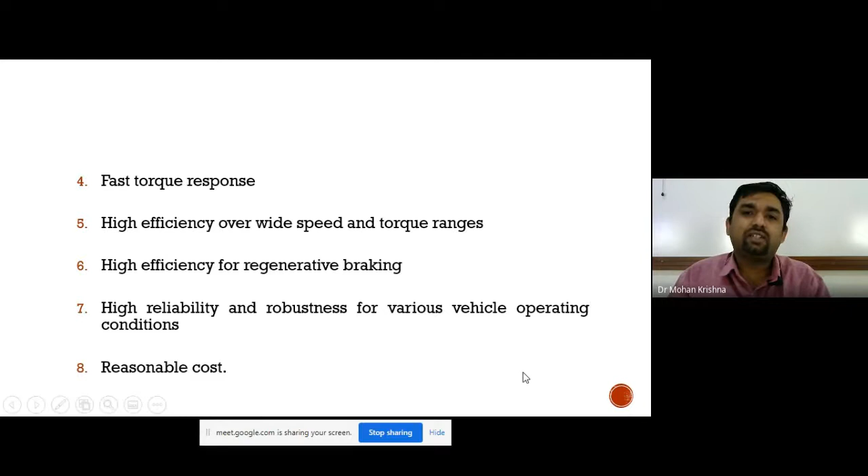So once again, our power semiconductor technologies, the motor technologies, they are constantly evolving. Even the control algorithms are constantly evolving. So therefore, our propulsion system growth has been totally dependent on these technologies. So DC motors have generally been prominently used. This was up to 1960 or 1970, after which, with the advent of power electronics, induction motor has taken over DC motor.

So for the same torque and power rating, we have induction motor which is considerably lesser in size than that of a DC motor. And DC motor requires more maintenance. So most of our electric and hybrid vehicles come with commutatorless motors, either permanent magnet synchronous motor or BLDC or induction motors. Some of the advantages being higher efficiency, power density, operating cost.

Induction motor is very robust, rugged. It is rough and tough. It works out well in any hostile condition. And it requires less maintenance. So these are some of the developments, and I would also like to show some of the EV motors which are used in existing EV models.

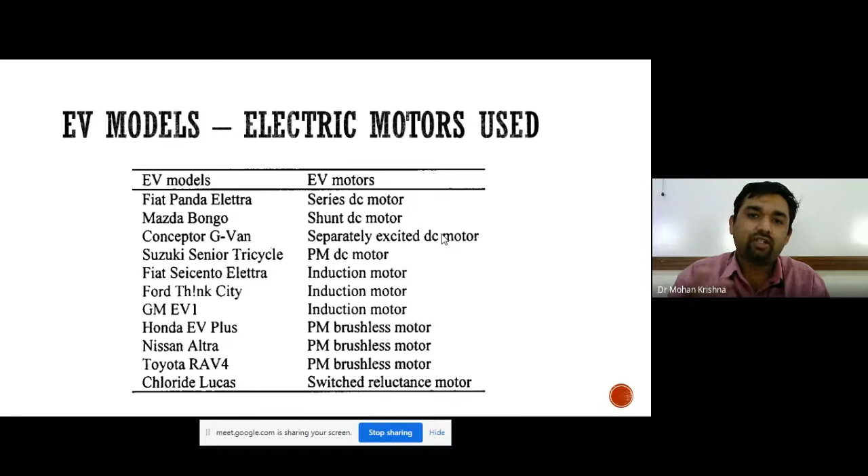So these are some additional information. You can please go through them. The students, especially automobile and mechanical engineering students, as electric and hybrid vehicle as such is purely interdisciplinary. So if I can take 5 or 10 more minutes.

So here, whichever engineering domain you belong to, you may all come from diverse engineering backgrounds, but you all have something to work for in electric vehicles, right? So the chemical engineers can focus on battery technology, battery chemistry, right? So come up with battery configurations which have higher energy density, which have more charge discharge cycles, right?

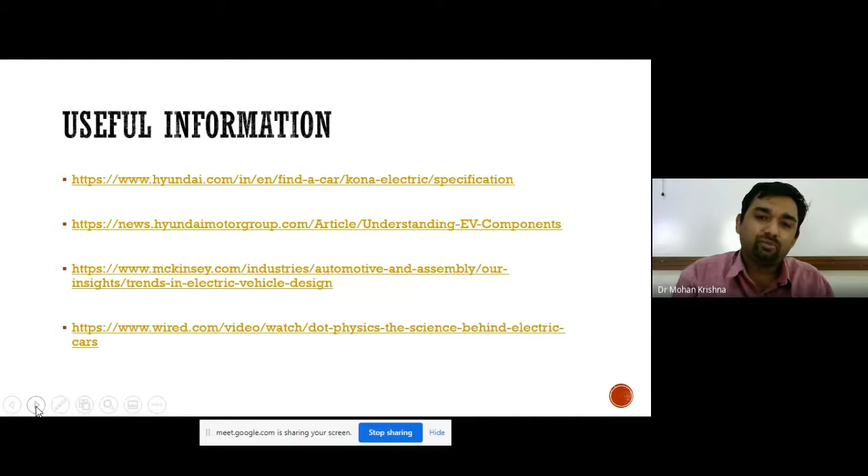Nowadays, we have internet vehicles. Your Morris Garages MG Hector is an internet vehicle. So if you want to have a cloud-based mobility platform, a next generation mobility platform, I think either Tata Nexon or Hyundai Kona come with a cloud-based mobility platform where they use all these data for analytics. So everybody has a role to play in an electric and hybrid vehicle, irrespective of which engineering background you come from.